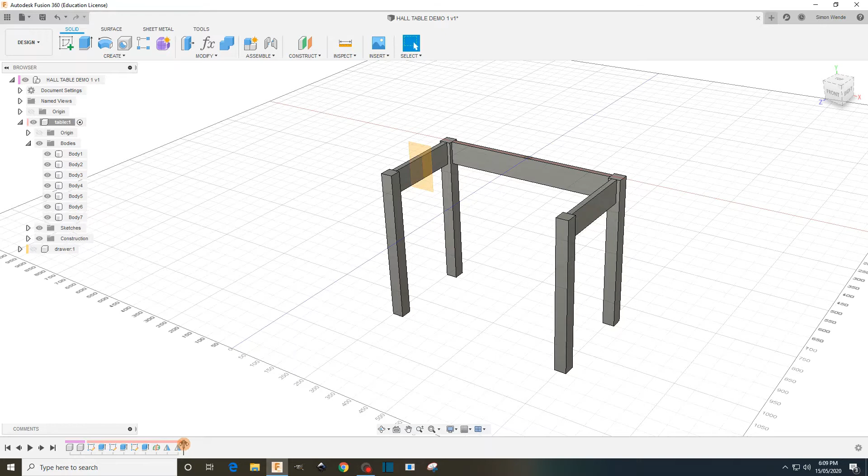I can actually do that. I can actually go back in time and do that. Here's my little time machine down here. This shows every action that I take. I'm going to move it back to just after I created that leg.

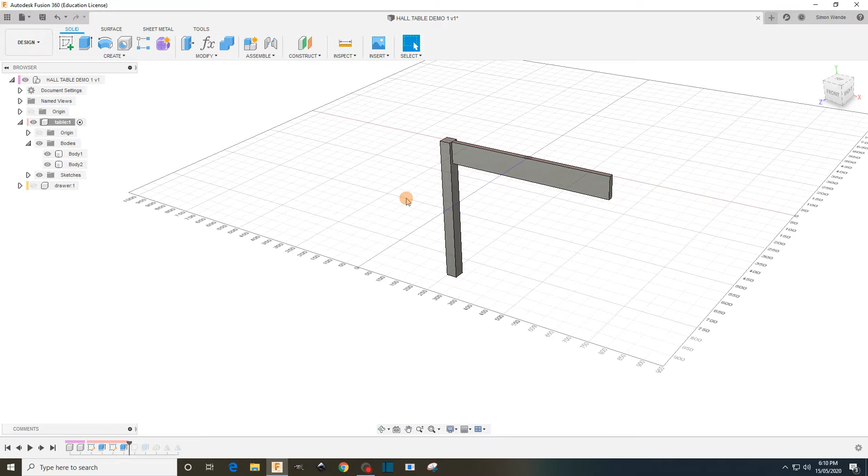Oh, the leg's gone, so I've gone too far. There it is. So that's the extrusion on my leg. It's very important that we do the right or correct faces of the leg. I want to be looking at the back of the leg, so I'm going to turn it around like that. Now I'm looking at the back of the leg.

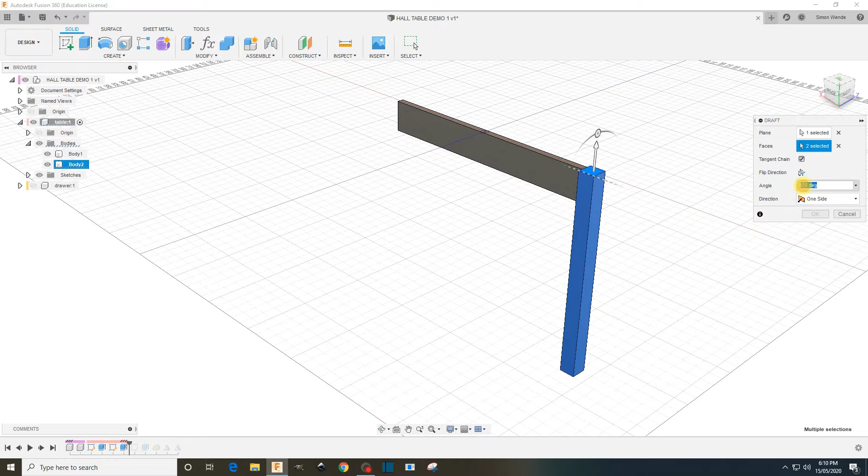I want to go into Modify, Draft. The plane that I select is this one, the top one, and the faces are that one and that one. The angle is 1.5. Oh, I can see it flared at the bottom, which is the opposite of what I wanted, so I can either make it negative 1.5 or I can flip direction.

There we go. Okay, now if you've made a mistake and done it the wrong way, or the wrong plane, the wrong faces or anything like that, when you redo it you just need to make sure that the angle is 0 before you select the faces.

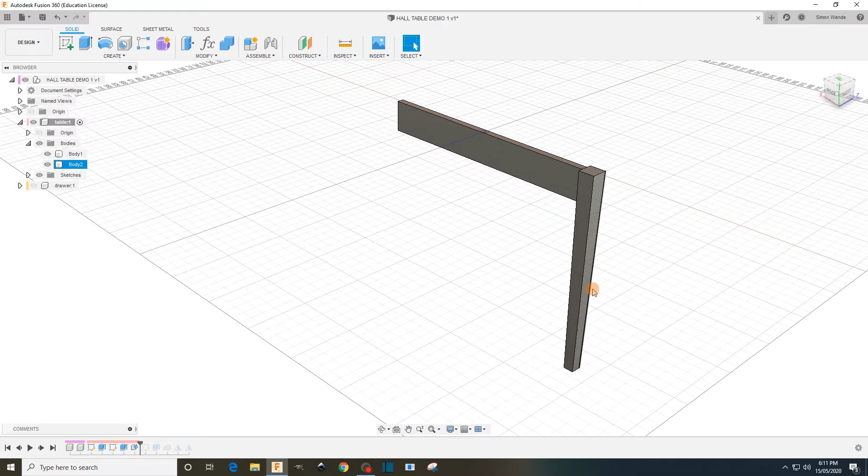So this is looking pretty good. There's my leg, it's got a draft on it. I'm going to bring my time machine back to the present. And all those legs are now drafted.

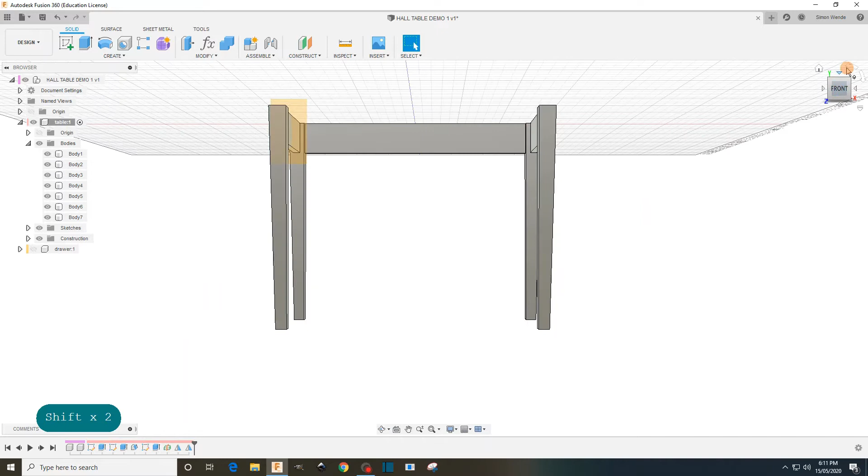All right, we're going to look at it from different angles. We'll just get this down to perspective with ortho faces. All right, so we want to make sure that our rails are horizontal. If you've done the wrong faces on your legs, then your rails won't be horizontal like this, and you need to address that now. From the side, that's looking good too. All right, there we are.

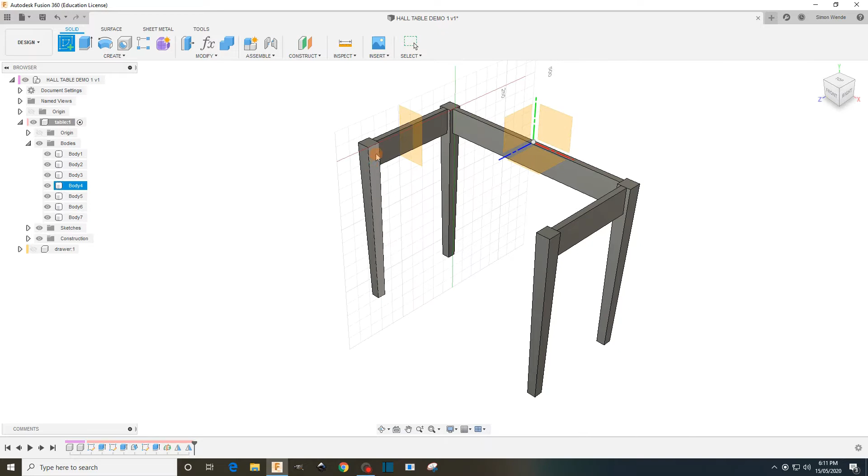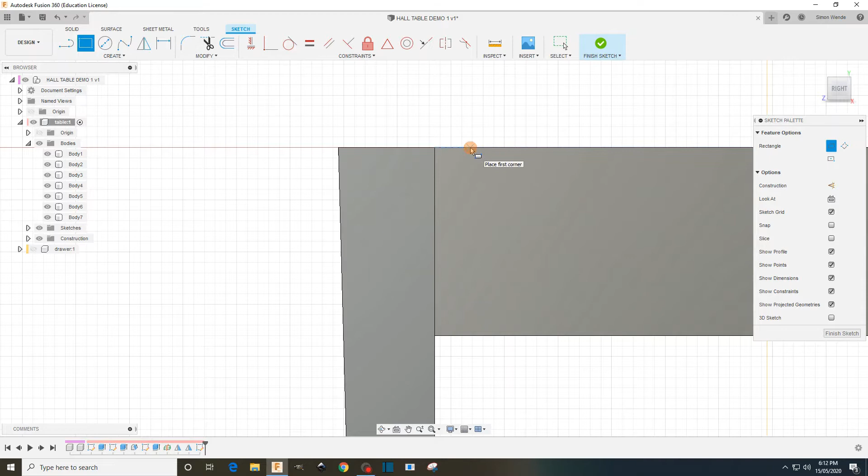We're going to carry on. Next, I'm going to do the front rails. So I'm going to select, make a new sketch on that face in there. And I'm going to get my rectangle tool, and I'm going to bring it so that it just, well, actually I can just do it over here until that black cross turns into a blue X like that. Click, drag, and it's going to be 19 tab 42, just like that.

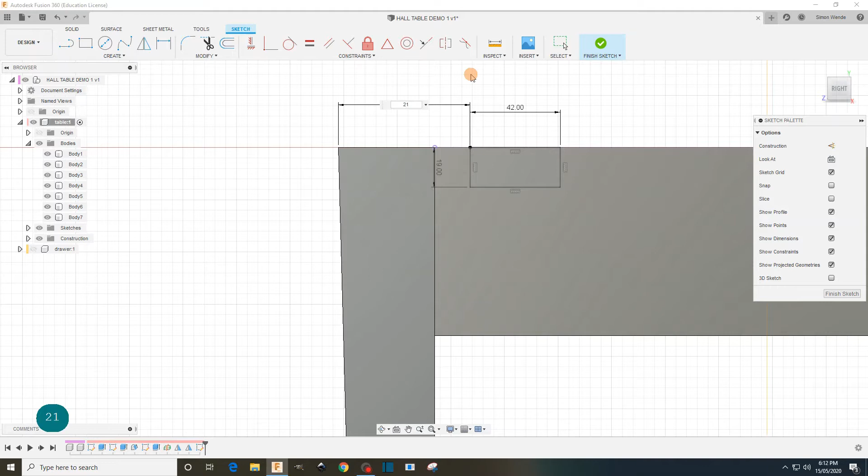Okay, and I'm going to put in a dimension. Again, if you haven't got the dimension tool here, you've got to go down to Dimension, click on those 3 dots, pin to toolbar. Get the dimension tool, put a dimension between here and that little point there, and make that 21. Just like so. So that's one rail.

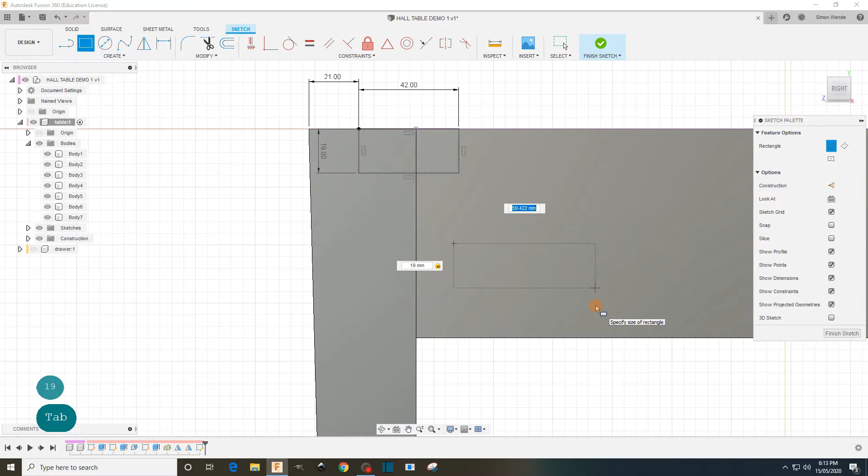Then I can either make another one, copy it, or mirror it, or whatever. It's probably just quicker for me to make another one. 19 tab 42, enter. Now that's in the wrong spot, so I'm going to use my constraints to align that line with the bottom here.

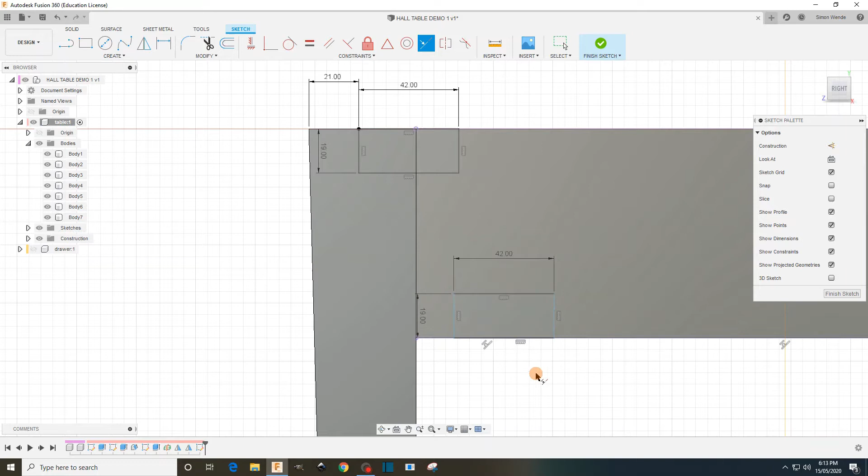So I'm going to click on that line, and I'm going to go collinear with that line. So when something's collinear, it's stuck on that line. I can move it backwards and forwards along that line, but I can't go up and down. Okay, just backwards and forwards because it's collinear. So that's constrained that way, but I can still move it that way.

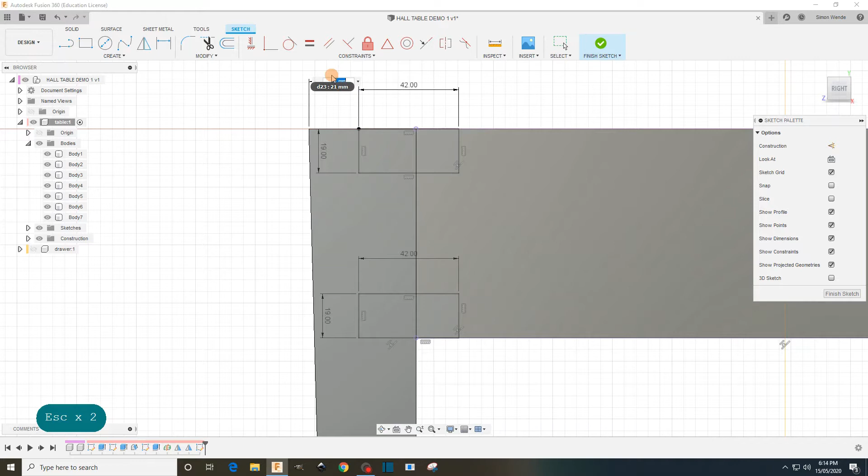I need to constrain it this way. I could put in a dimension like that one, but I think it's a little bit nicer to make that line collinear with that line. That way, if I want to change that to say 25, for instance, they both move. If I delete that completely and move that, then they both move because they're collinear. Cool, I'll just put that dimension back in. Oops.

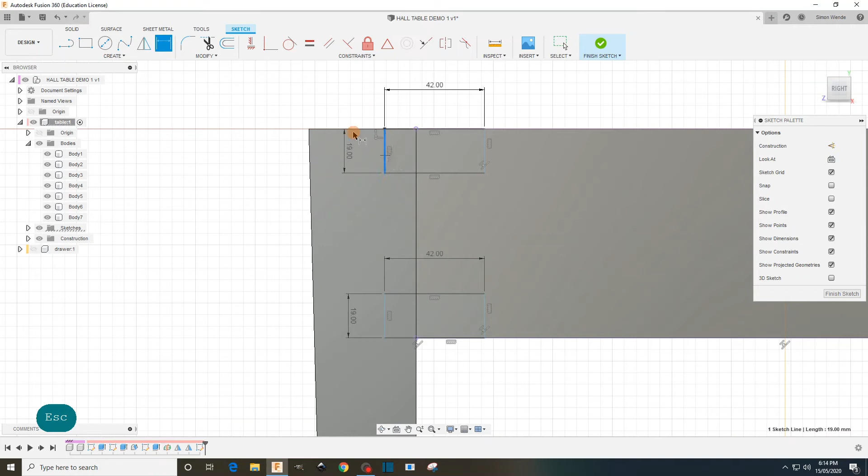Great, finish the sketch. Now let's extrude both of those. We need to select the whole rectangle. When I mouse over or click, it only selects part of it. I need to make sure I'm selecting everything I want to extrude. There we go, now it's all selected.

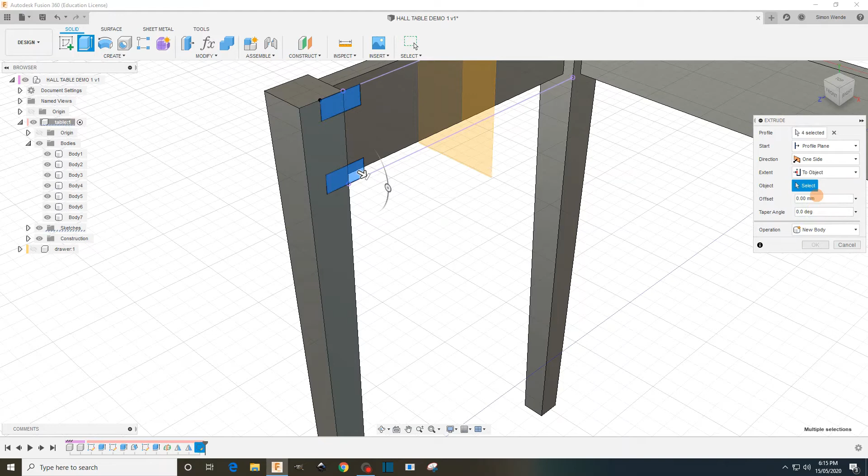The distance I'm going to extrude is not a distance, it's going to be to an object. And the object, see, it wants me to select the object. The object is the inside of that leg, see that plane in there.

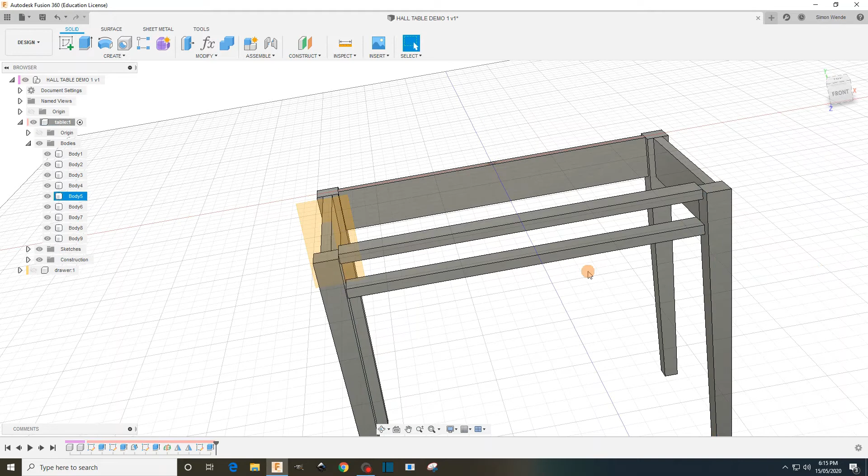Instead of joining, I want to make that a new body. And that's it, that's okay. There we have it, all right.

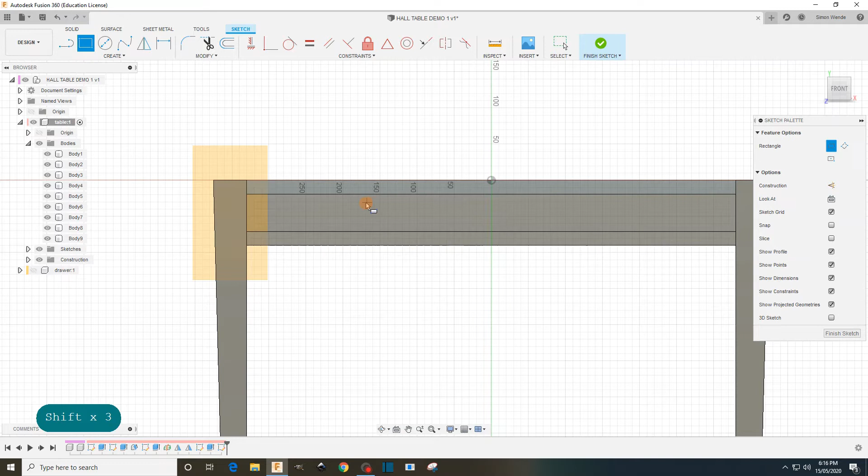Next bit, we're going to start building our drawer runners. So create a sketch on that plane and create a rectangle. Again, mouse over there until it snaps to that line.

Good, now let's just dimension this stuff. Between there and there, I could have done it before. That's 19. And this dimension needs to be that dimension. If you've snapped it to this line, then it'll be constrained, but otherwise it needs to be 52.

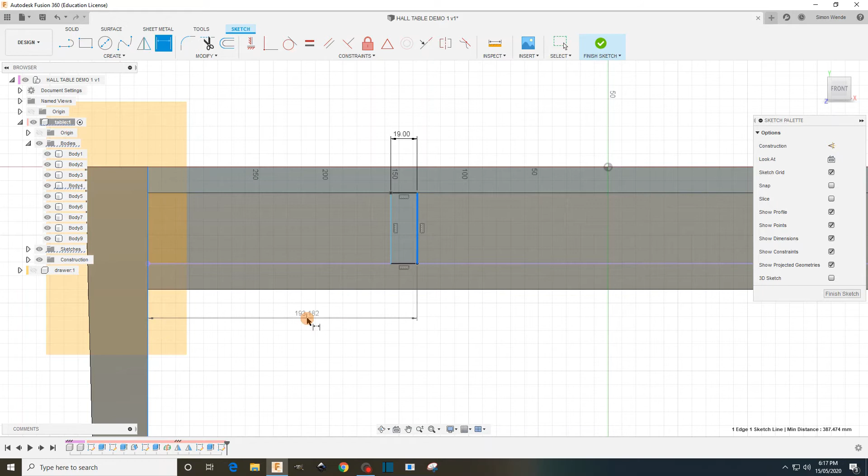What I haven't dimensioned is where this rectangle is along that plane. So here's what I'm doing: I'm going to dimension between there and the inside of that piece of wood there. That dimension is a bit of a formula. I'm just going to tell you the formula, and we'll probably, I'm not going to go into why it is, but it's kind of neat.

The formula is this: open brackets, then type in back rail minus drawer width minus 2. Now 2, if you want to know, is because we want a 1mm gap on either side of the drawer. Close parenthesis, then divided by 2.

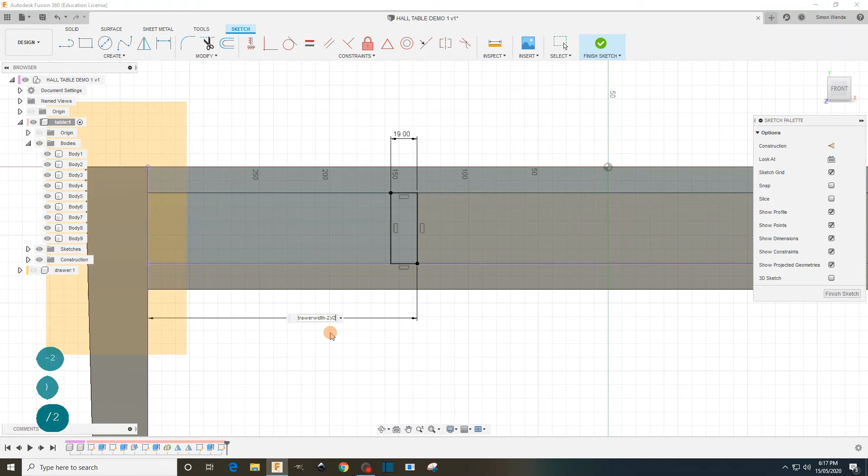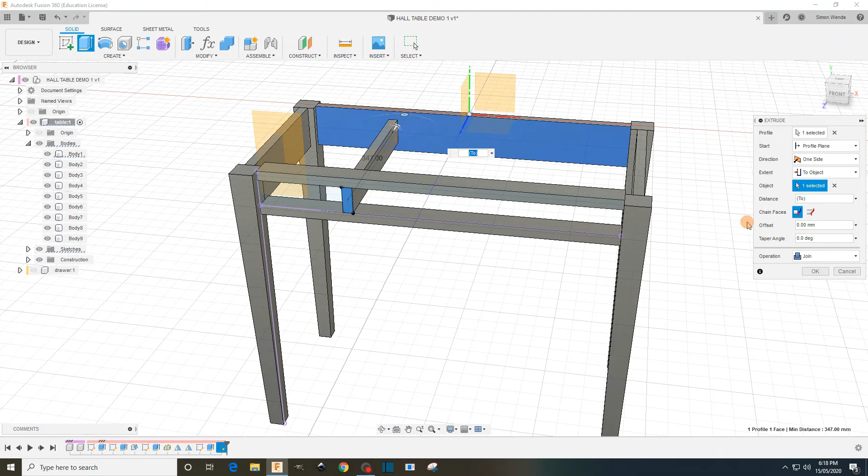There it is. Okay. Finish that sketch, and extrude that all the way to an object, and that is the object, and it's got to be a new body. Okay, good.

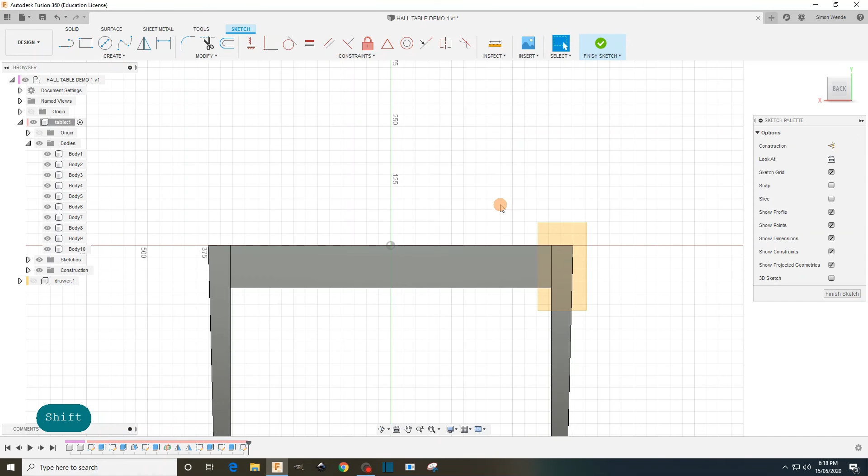Next we're going to build another little bit of the drawer runner, and create a new sketch on that surface there, the inside of the top rail. Now I can't see it very well, so I'm going to go up here, right click, opacity control, and make it 90.

Does that work? No, I'll go here instead. Right click, opacity control, 90. There we go. All right, so I'm going to create a rectangle.

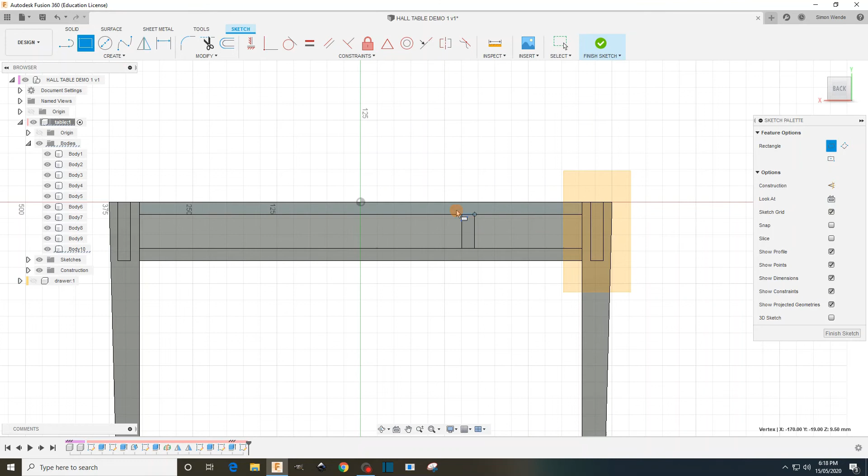Remember, this is on that side, so I'm going to go from that point up. It's going to be 19 tab 42, just like that. Excellent. I'll do it again down here, 19 tab 42. So I just built that rectangle and that rectangle.

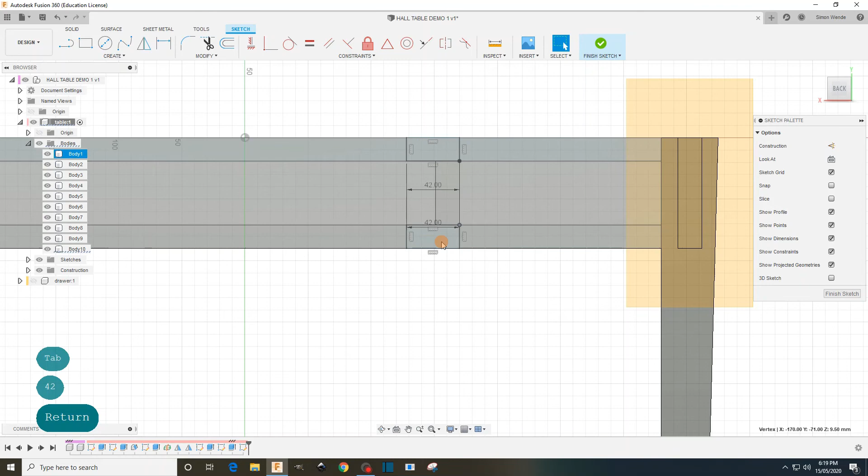Finish my sketch, there they are. I'm going to extrude that and that. Let me just make sure I've got all of the bottom one. Yep, good. And how far am I going?

Well, not distant, I'm going to go to object again. And the object is that. We're not going to join, we're going to go a new body.

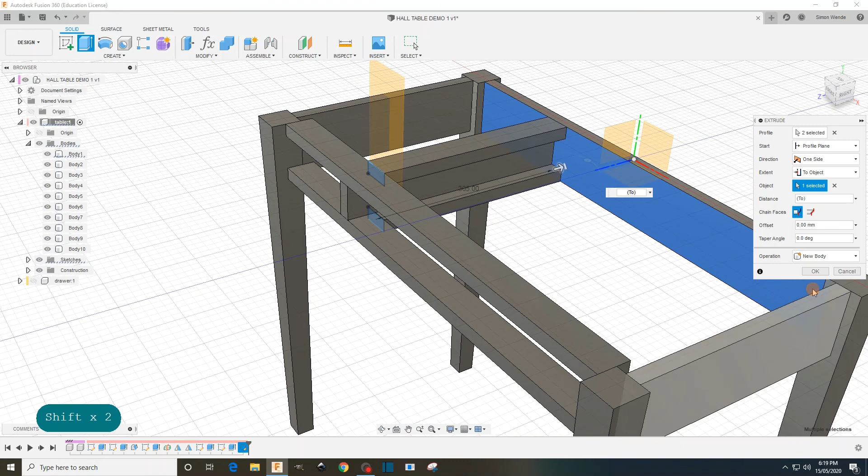So now, the fact that it's 90% opacity gets in my way a little bit, makes it a bit confusing. I'm going to right click table, go opacity control, and make it 100%. I just make sure that I did it here as well. Yep, all right, so looking pretty good.

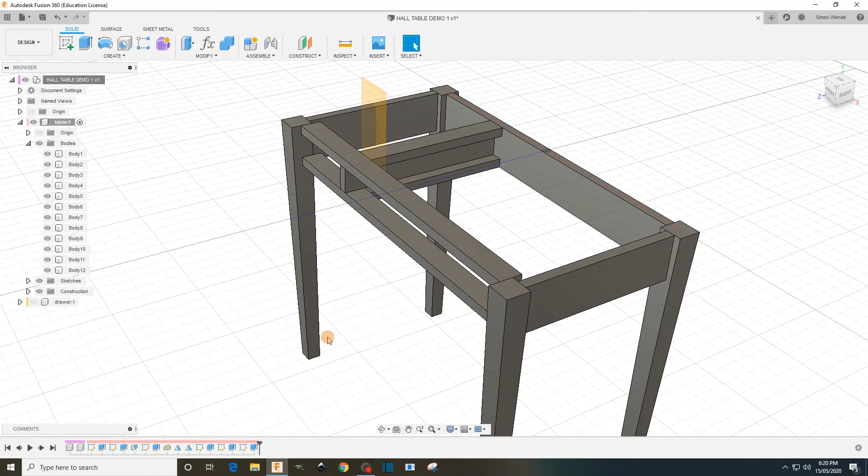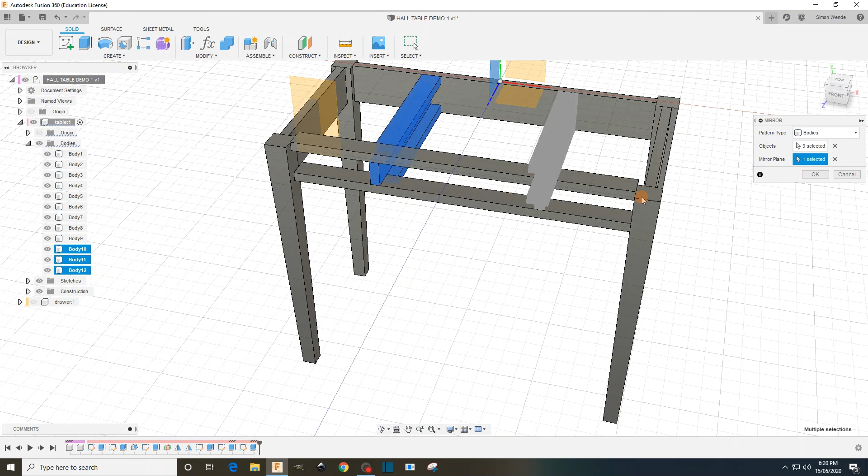I'm going to mirror these onto that side. So I've got three. I'm going to go create mirror bodies, select the bodies, that one and that one and that one. And the mirror plane again is that vertical one. That's what I should be getting. Okay, fantastic.